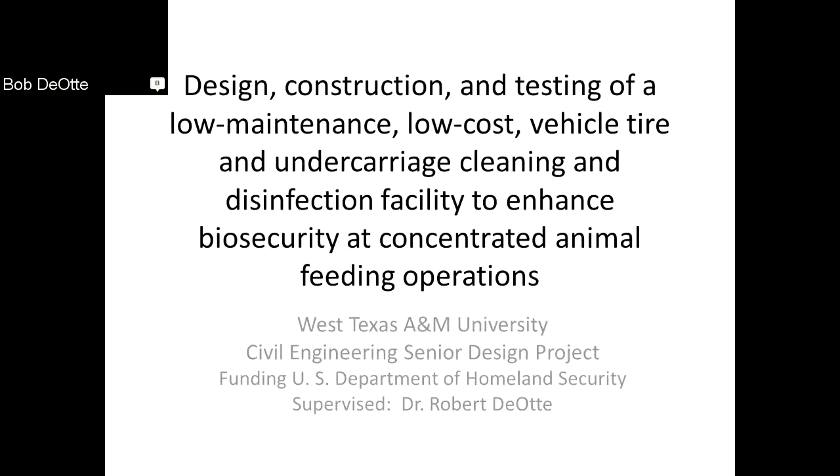Concentrated animal feeding operations, in case there are some of you who don't know, are defined as feeding operations that have 1,000 animal units or more being fed in a single-use facility continuously for 45 days or more. The numbers provided by EPA are 1,000 head of beef cattle, 700 head of dairy cattle, 2,500 head of swine weighing more than 55 pounds. They're regulated under the Clean Water Act.

In the Panhandle, we don't have CAFOs as small as any of these. The closest we might come is the swine farms, where one of our swine farms has only got about 6,000 head. But we have 20,000 to 100,000 on our beef cattle feed yards. Probably the typical size is about 50,000 head, but we have plenty that are larger than that.

Dairies -- I was at a National Institute of Animal Agriculture meeting a year or so ago, and somebody called large dairies 3,000 to 5,000 head, and I was like, we don't do that. We don't have any dairies that are less than 2,000 head in the Texas Panhandle anymore. They were wiped out by TB a few years ago. So we typically are 3,000 to 40,000 head milking cows on a dairy, and that 40,000 head is a big dairy. Our swine farms are 6,000 head to 40,000 head.

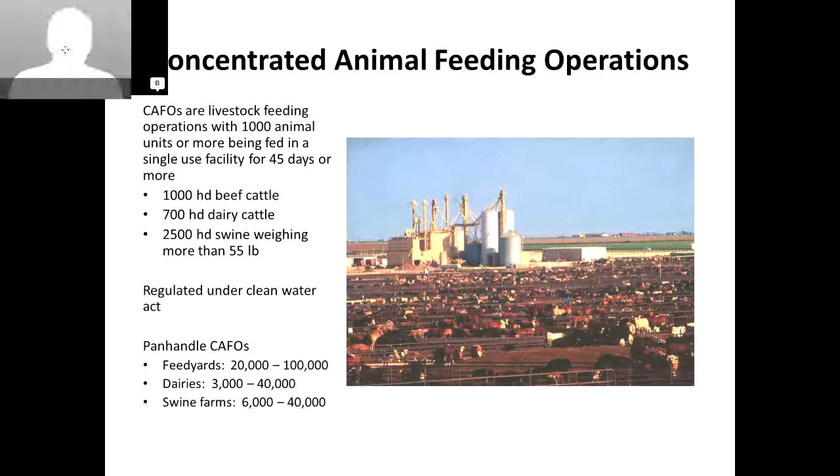And then you're seeing, if you can see my pointer here, cattle in their pens. Back here is the mill where we steam flake the corn. And then these are storage bins.

So if you look at a dot map from Ag Statistical Services and superimpose this rectangle, that's 300 miles across, 600 miles long, and within that rectangle that includes the Texas Panhandle, Oklahoma, Kansas, Nebraska, eastern Colorado, eastern New Mexico, we raise about 80% of the fed beef in the United States. So out here, most of that is in feed yards.

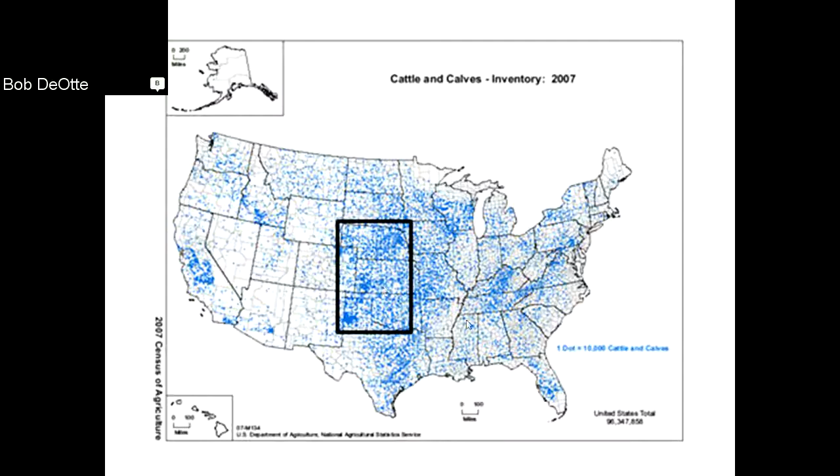This is a picture of the east side of Hereford, Texas. Hereford, Texas has about 450,000 beef cattle within its zip code on any given day. If cattle could vote and vote the way we wanted them to, the Texas Panhandle would control a lot of policy.

This is a feed yard, here's a feed yard, here's a feed yard, here's a feed yard. All of these things that look sort of like little cities, well, they kind of are -- they're little cities for cattle, and these roads are where they drive up and down to put feed in the bunks. Over here's another feed yard. I don't think you can see it very well, but up here's another one. So we have a lot of feed yards.

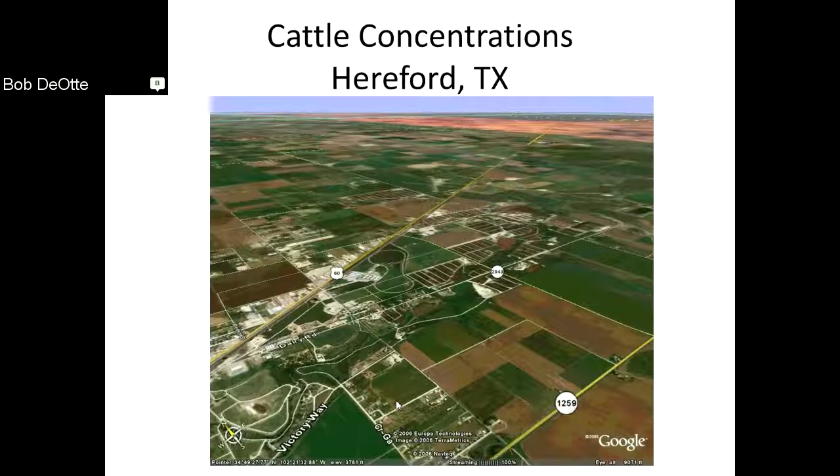So our objective was an affordable undercarriage and wheel wash. We wanted something that could be used every day in routine biosecurity. We also wanted to put a little bit of a carrot out there for the feed yards to adopt this, expecting that cleaner vehicles would lead to less maintenance.

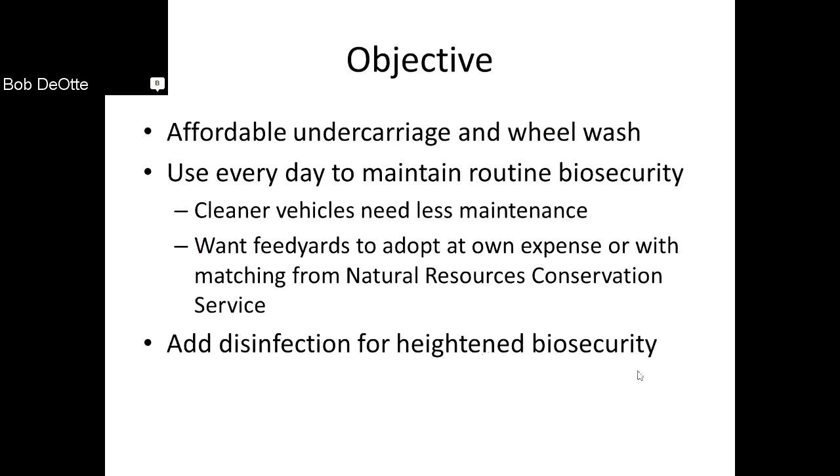The objective, there's also an objective that we can add disinfection for heightened biosecurity, and we'll talk a little bit more about that in a minute.

So our specifications—this began as a student senior design project. We did a couple of different semesters of it. We told them it had to be able to operate in freezing conditions. On the one that we ended up installing, we added a recirculation pump and a 3,000-gallon tank to keep the water moving, because we don't freeze deep or hard here. We do freeze, we might get below zero, but it won't stay that way for a week or two—it'll stay that way for a day or two. So for other locations, as we moved north, we had to consider adding antifreeze or heating or doing something of that nature.

The criteria was that we had to make the vehicle visibly cleaner. Some work done by researchers in Canada found that just by getting the mud off, you get a 1 to 3 log reduction in infective agent just by washing alone, not doing any disinfection yet. And certainly disinfection doesn't do much if all you do is apply the disinfectant on top of that cake of mud.

And then it has to be water efficient. We're in a water limited area in much of the high plains. When we get up into Nebraska, it's not so much true, but down here it is. We feed off of the Ogallala Aquifer, which is a non-renewing resource in this part of the country. So we wanted to make sure we weren't using a lot of water.

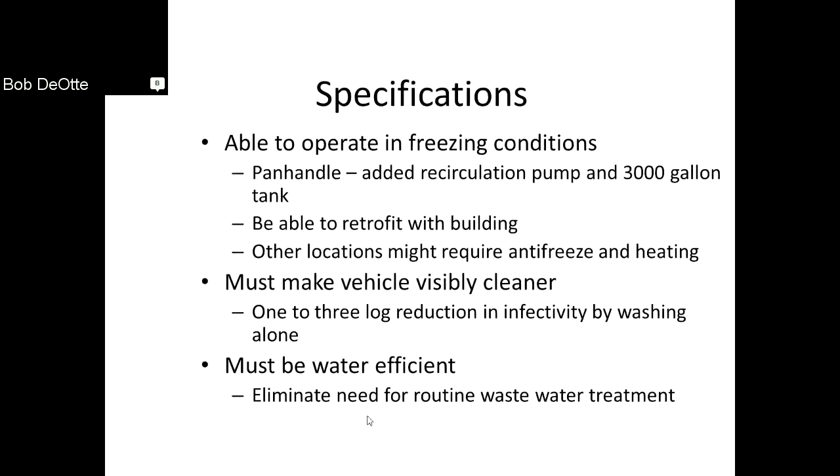So design parameters: the students had to look at how many vehicles, and how they're going to dispose of waste. They had to consider environmental regulations, both federal and state. They had to look at their CAFO rules and pollution discharge elimination systems. Then they had to look at the vehicle washing rules—many states have those, maybe most. Certainly we do in Texas, and actually through the whole High Plains, all 5 states we would be considering that.

And then they had to do the engineering economic analysis. I will tell you, engineering students, that is not their favorite thing to do—they just want to design great, fun things and not worry about how much it costs. But in the real world of engineering, that's a really, really important consideration. So they had to look at the initial cost, but they also had to look at a distributed operation and maintenance cost for the system.

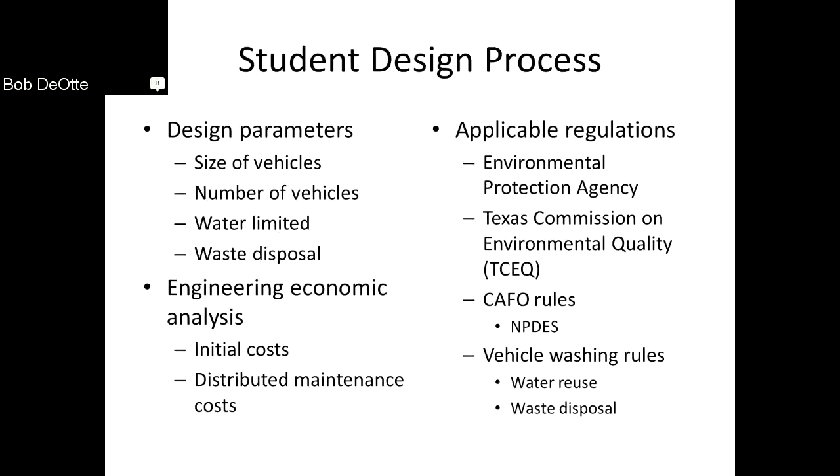They went in and evaluated the soil bearing capacity—could the site handle, after excavation and installation of the system, the weight of the vehicles, the undercarriage, and wheel wash? Part of that is just because this is a senior design capstone course, and they have to bring in all of their engineering coursework. So in most circumstances, that wouldn't be something we'd be too concerned about.

But they then had to design their foundation, the piping system. They had to specify some sort of control system, and they had to figure out how to reuse the water. I say here, specified water decon system, which is what they did, but there are other ways to recycle the water, as we'll see in a minute.

They grossly exceeded the budget. I think their operations costs were going to be $750,000 per year. The feed yard manager watching the presentation turned around and looked at me and was like, 'What?' I was like, 'Yeah, I don't know where that came from. That wasn't in there two days ago when they ran through this with me.'

But they made a modification, and it was overly complicated. So you want a system that's going to be pretty easy to operate and not require a whole lot of maintenance.

One of the specifications we gave them is that this should be a self-operating system. So a vehicle can drive up to it, and it will start itself up without having to have an operator there. That's important for a couple of reasons—one is the manpower, just adding another person to the payroll. But the other is that in biosecurity protocols, we don't want the truck driver getting out of the truck.

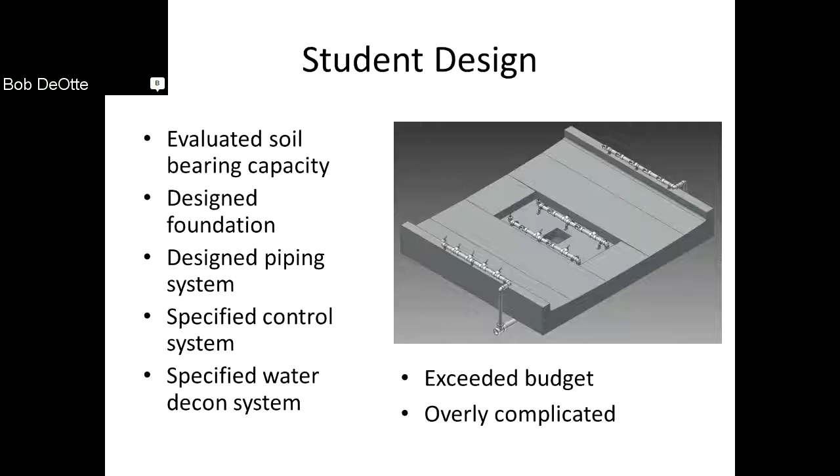So here is the commercial unit that we installed. As I said, we did it over two semesters, and students never quite got to the target. So we went back and worked with Lori and Michelle and reworked our statement of work a little bit, and decided that if we could find a commercial unit, we would use that. And we did—so this is the commercial unit, just this unit here, not the tank. Tanks aren't very expensive. And the photo detector out here and the solid waste discharge is hidden by the mirror of that truck. This cost about $60,000.

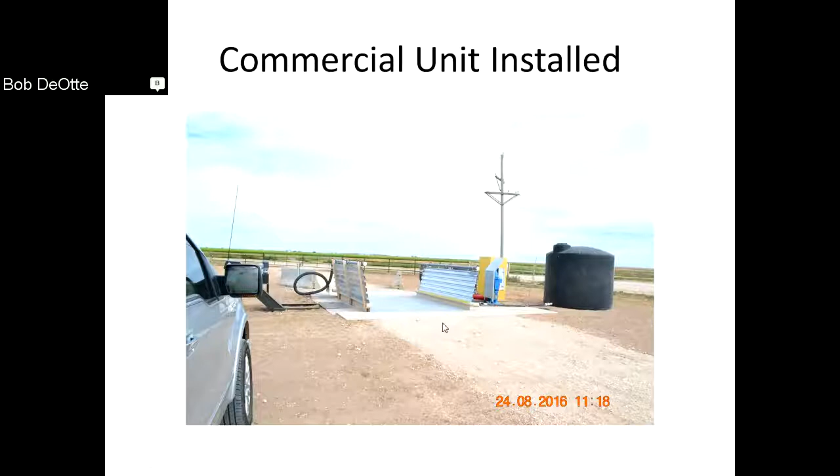So we modified it and bumped the price up to $70,000, with another $15,000 for installation. So here is the unit before installation on site. This horizontal bar here is just a little bit above ground level when it's installed. The rest of it is buried underground, which helps us with the freezing issue because we don't freeze deep or hard here for the most part.

And so having that filled with water, even without the recirculation pumps, our calculations indicated we would be in pretty good shape. We went ahead and put the recirculation pump in just to make the feed yard management people a little bit happier with the whole deal. So here is the solid waste discharge up here, here are the two side tracks, and over here is the center track.

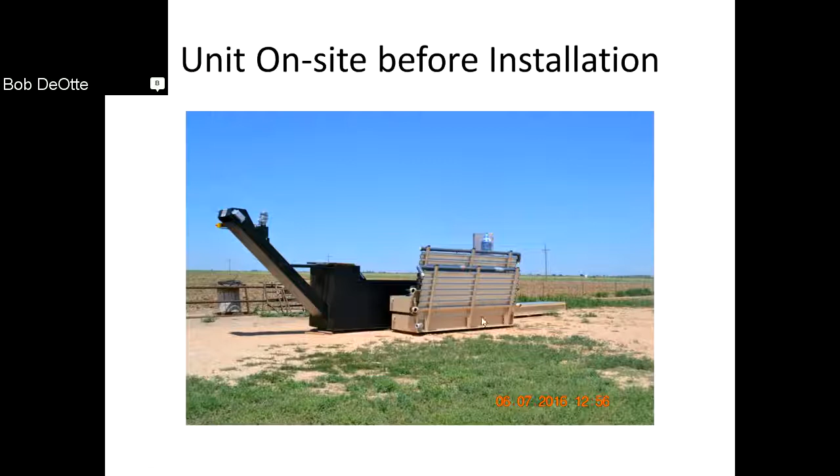This is the same system installed, really for temporary use, at a construction site at Fort Mill, South Carolina, and this part is part of the tank. We installed ours differently because it was going to be a permanent installation, so they do have these concrete aprons feeding to it, and then packed caliche back here and so forth.

They only have two tracks, but they have this sidebar with nozzles in it, and all of those nozzles are there to wash the side of the truck. We were less concerned about the side of the truck than the undercarriage, and that was the whole group of us that went out to look at this, which included people from NRCS, DHS, APHIS, and then me, an engineer working with me, and the feed yard manager.

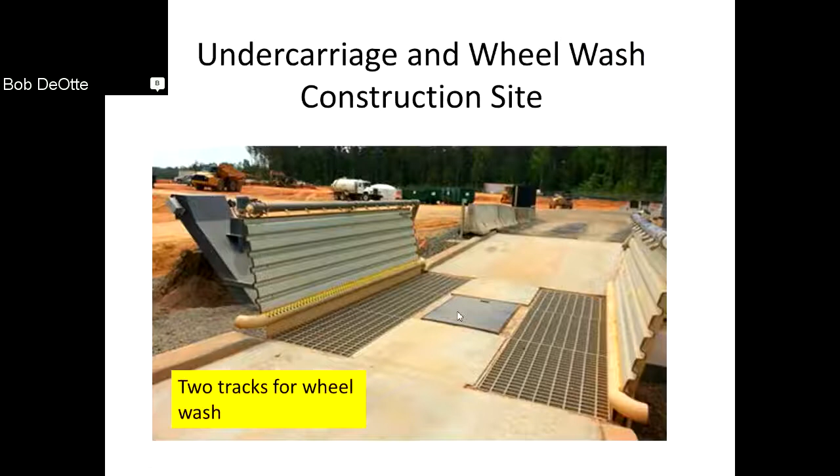So this is the installation installed. There are all sorts of sightseers here—none of them had anything to do with this project except for this guy who installed it. You can see here that we've got this middle track running through here, and that's to get more water on the undercarriage part of the vehicle.

The construction site, they're more concerned with track out, just muddy tires and making tracks on the road, and leaving little dirt clods that other vehicles will throw up into the windshields of following vehicles and break them, and stuff like that. So it's a liability issue partly, and it's partly an issue of aesthetics.

So here you can see a nozzle, but this one is plugged and this one is plugged. There's another one here, can't see, and then a couple plugged, and then this one is another nozzle. So instead of 12 on each side, we had 4 on each side. That was a compromise we had to make to be able to add this track in here and have enough water pressure to be able to have all those nozzles being fed and shooting up enough.

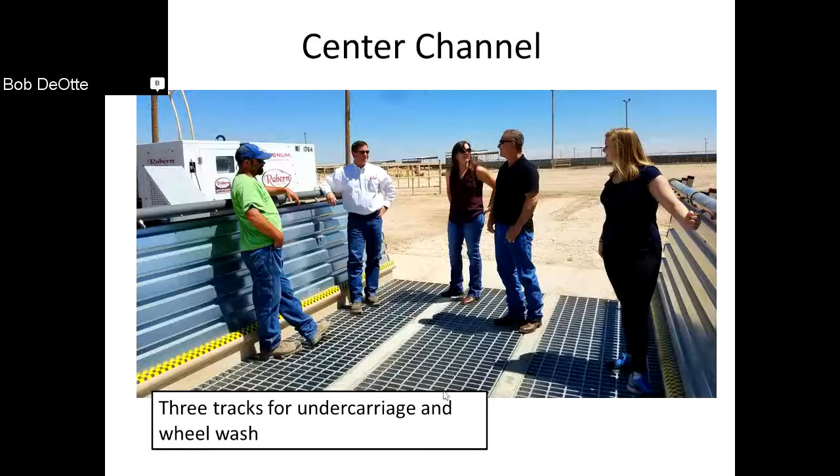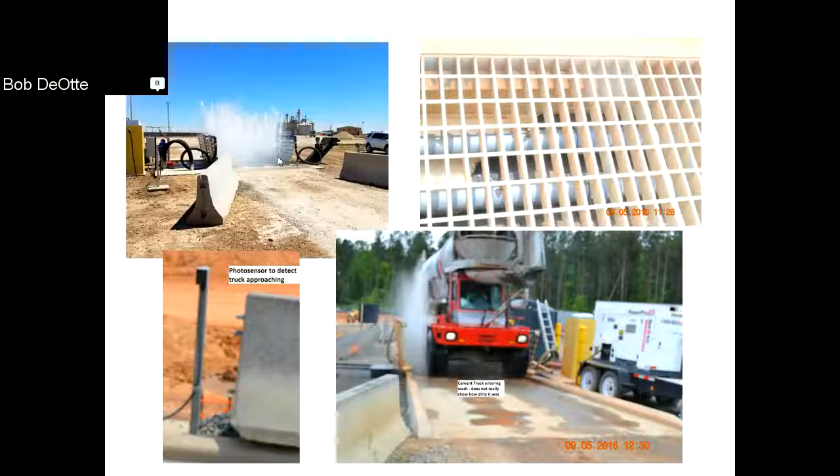So that 2 to 3% moisture content makes it very handleable, pretty easy to handle. We've checked and made sure that the classification in normal circumstances is a non-hazardous waste, so we can dispose of that on site at the feed yard.

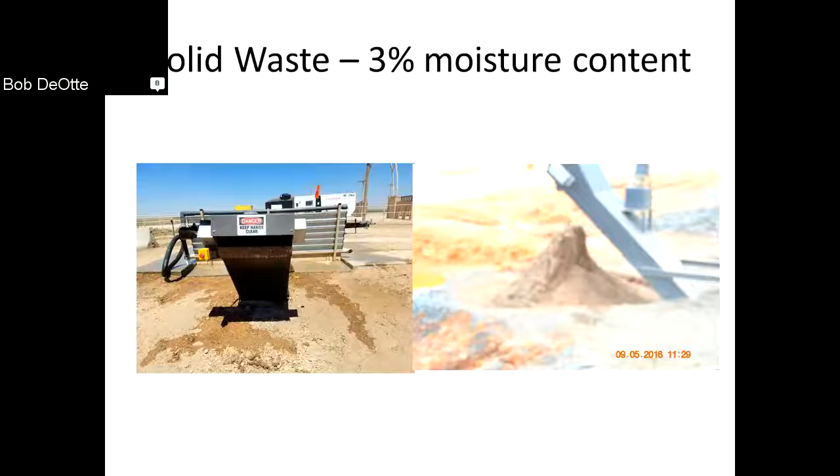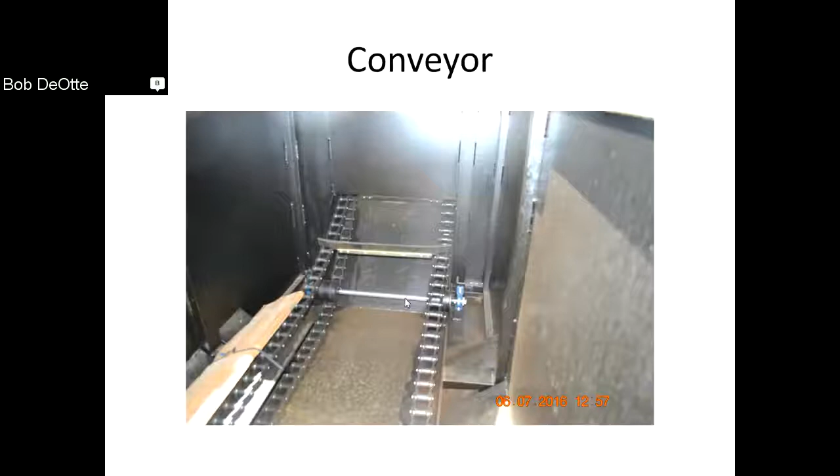This is looking down into the conveyor belt and where we pull that dirt out. So here's the belt here, a chain-driven system.

So what we have is an affordable commercial unit. It was modified to add the central channel to concentrate on the undercarriage more than the ones at the construction sites. It has some similarities to the student's design, or maybe it's vice versa, because this system's been on the market for a while. I'm pretty sure the students never found this. The other issues of their design indicate that they didn't really try to plagiarize anything.

The 3 gallons of makeup water per vehicle is phenomenal. This particular feed yard where it's installed has about 80 trucks entering and leaving per day. So 3 gallons per vehicle, that's about 240 gallons. So that's maybe 8 baths, what we put, 25 to 30 gallons in a bathtub to take a bath, if you take baths instead of showers. And that's because of the polymer coagulant.

And so I mentioned earlier that we have to be able to do disinfection. What we would do is put a disinfection system just down road of the wash station and pump the disinfectant through there and not have to worry about it getting into the water and interfering with the ability of the coagulant to function properly.